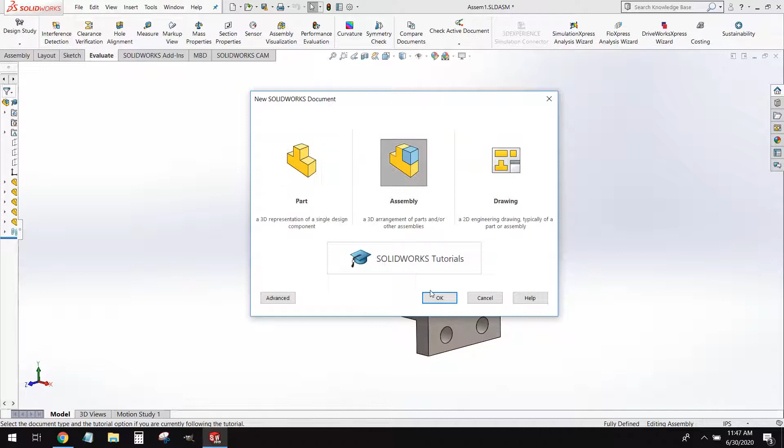We're going to go ahead and create a new assembly file. It's going to give us our blank workspace, and it's going to ask us to insert our first component into this assembly.

There's really no hard and fast rule as to what your first component should be. The way I like to think about it is, imagine you have all your parts laid out on your desk. The first component you insert should be the first piece you pick up and start attaching other parts to. There's no hard and fast rule, it just works a little easier for me, so that's what I recommend.

So we're going to go to Browse, scroll to the folder where we have all of our parts saved, and open up the piece called Base Plate. It should look like this. We're going to go ahead and just set this down anywhere in our workspace.

Now some people like to bring in all of the other components at the same time. I like to bring them in one level at a time, just so my workspace doesn't get too cluttered. So we're going to go to Assembly, Insert Component.

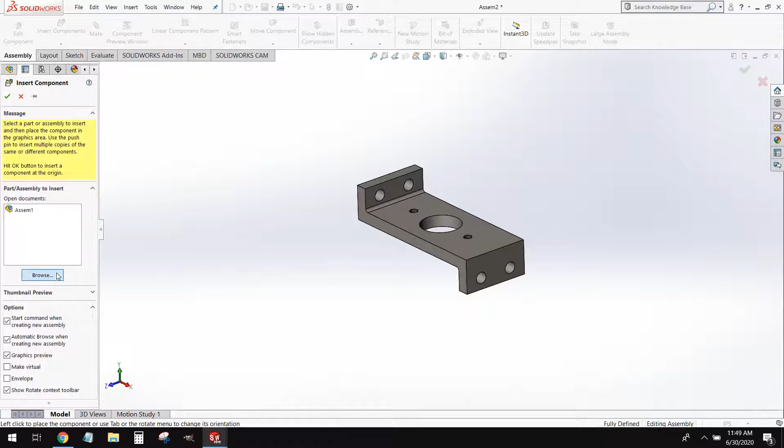It's going to bring us right back to that window we were just at. We're going to go to Browse, and open up this piece here. It's called the bearing.

Anytime we have a part that mates with screw holes, or that attaches with screw holes, we want to mate it using those features. That way, if the part is modeled improperly and the screw holes are misaligned, it won't actually fit together in the assembly, and we can fix the part before we actually have the parts made. It's sort of a check process for us.

So we're going to start by selecting our mate tool - it looks like a paperclip. We're going to select this top surface of our base, and select the bottom surface of the bearing, and click OK.

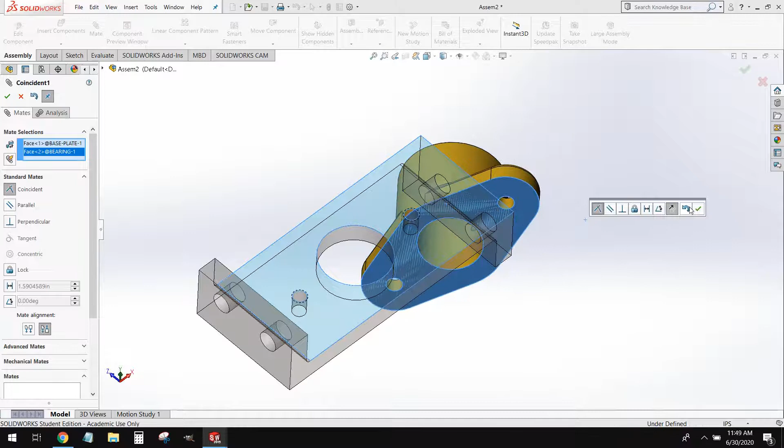All that's going to do is just put this bearing on the same level as the base. A lot of times if your part is slightly angled and you're dragging it around, it might not look like it's sitting on the base - that's just an optical illusion. If you put your part in a perfect side view, you'll see it can't leave that base.

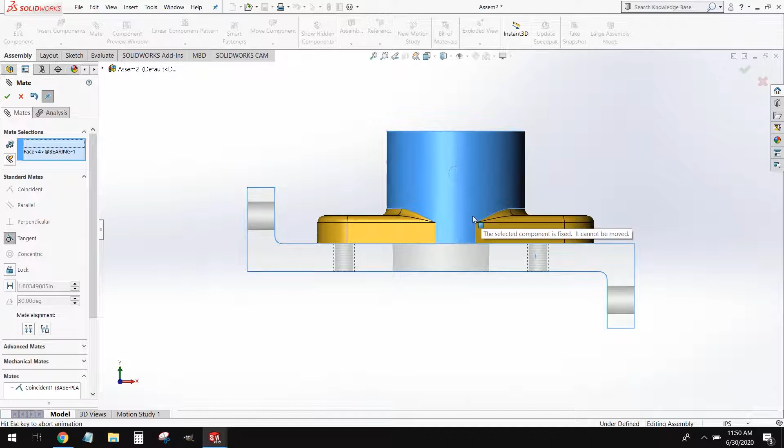It's stuck on there. So like I was talking about earlier, what we're going to do now is align this up using the screw holes.

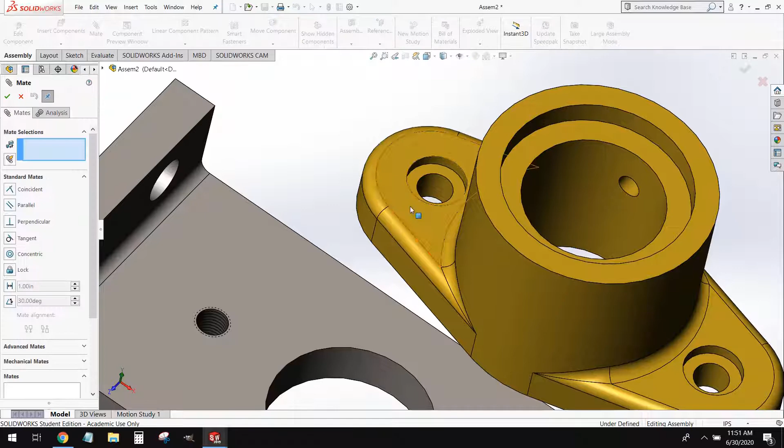To do that, we're going to mate this curved surface here to this curved surface here in our base. Make sure you select the surface when you do this and not the edge. It can give you an issue if you select the edges, so make sure you're selecting a surface, but otherwise the process is the same. You're going to select this surface here and this surface here.

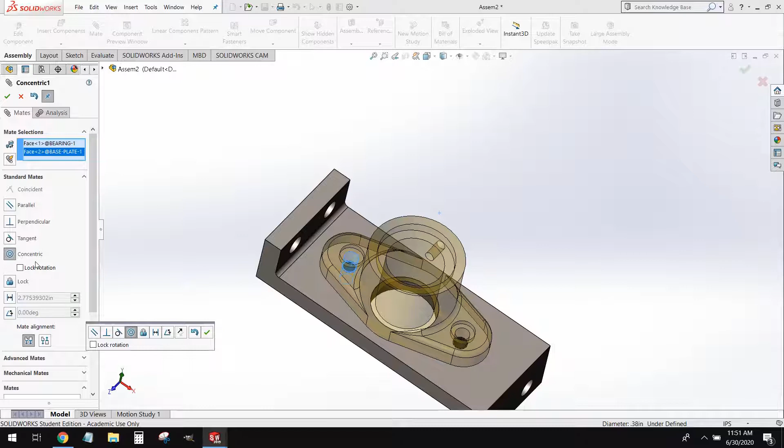Now, the mate tool is pretty intuitive. It typically knows what you want to mate and how it wants to mate it. In another video, we're going to cover the different types of mates and how they're used, but for 99% of your mating, just leaving it to the default settings will be fine. So we can go ahead and select OK on that.

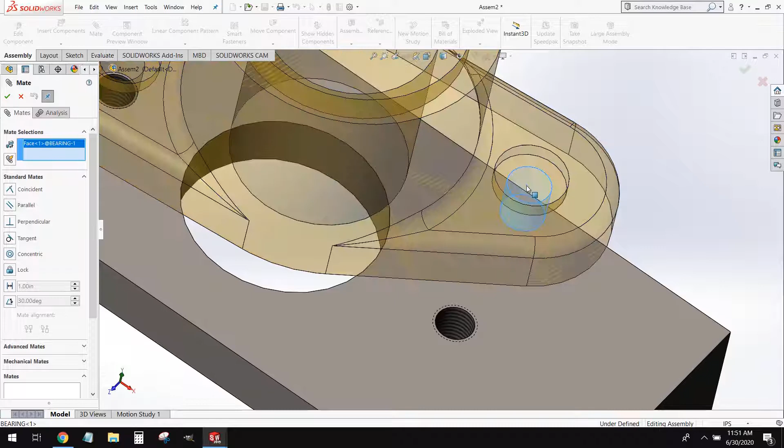Now what we've done is we've mated this with just one location mate, meaning this is still free to pivot around. So what we're going to do is do that same mate with this other screw hole. We'll go to our mate tool and select those two surfaces. If the part is made properly, it will just rotate into alignment. If it doesn't, that means there's an issue with the part and the hole spacing, so that's something you want to pay attention to. And we can select OK.

Now in your model, you'll notice this bearing has a hole in it. It doesn't matter which side that hole is on. It could be the left side, it could be the right side.

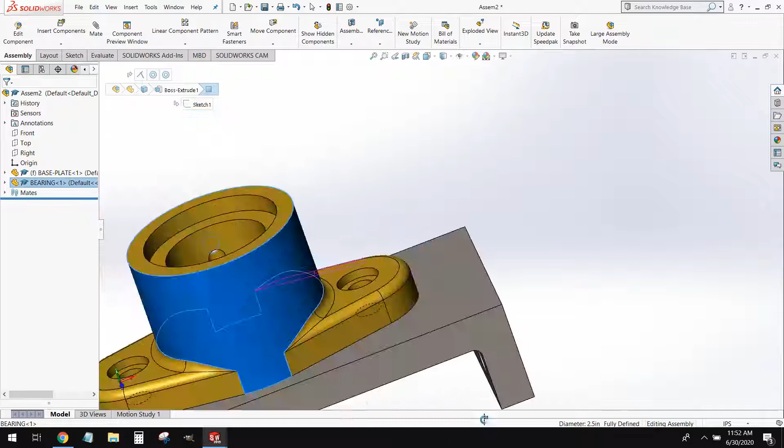So once we have that in, what we're going to do is put in the screws that hold this in place. We're going to go to Insert Component, and we are going to open up this screw, this guy right here. Now we're going to need two of these. What we could do is go to Insert Components, Browse, and bring in another screw. Or, the quick way is to press and hold Control on your keyboard, click, and then drag out a second one. You can drag out hundreds of these if you need to. It's a really quick way to bring in multiple parts.

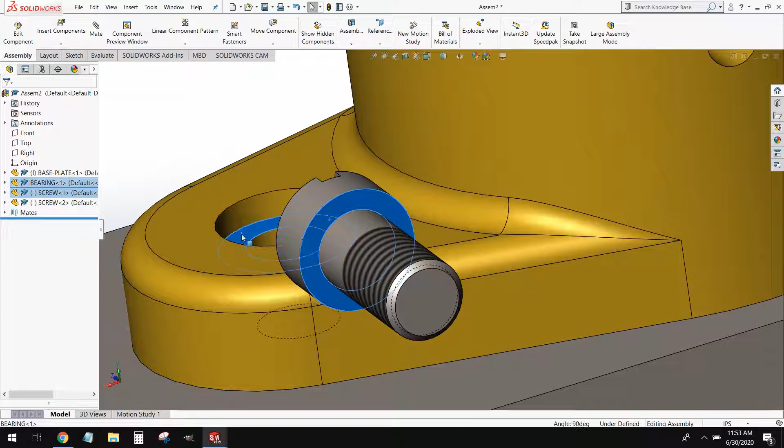Alright, so we're going to deal with one screw at a time, and we're going to mate this very similar to how we just mated the bearing. What we're going to do is select the underside of the screw head right here, and we're going to mate that to this surface here in the bearing. So we can mate that, and we can select OK.

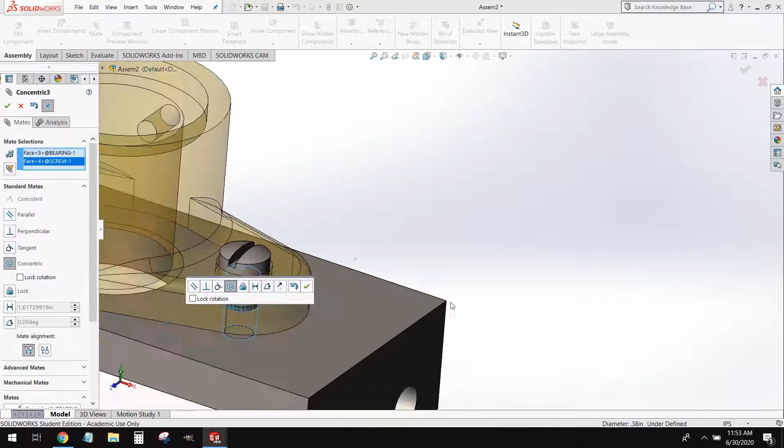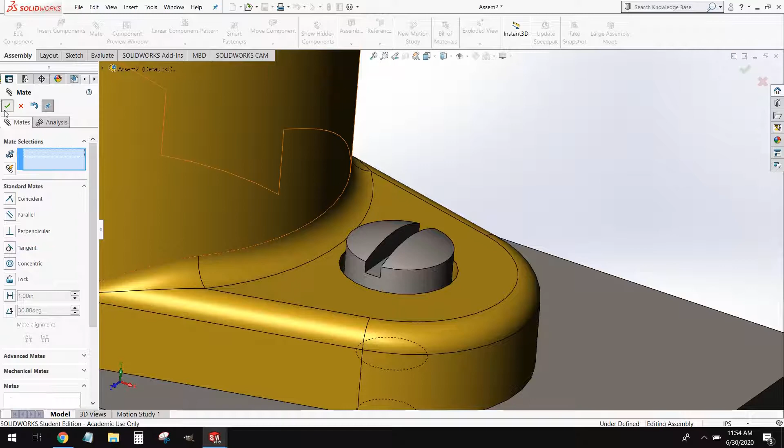And then to get this to sit inside that screw hole, we're going to mate that curved inside surface to the cylinder of the screw hole. Now when we do this, we're going to select lock rotation. What that's going to do is prevent this screw from spinning. I will leave the second screw unlocked just as a demonstration to show you what effect that has. Truth be told, it's not a huge issue for us, but it is something we want to pay attention to.

So what we're going to do is do that same mate to the other screw, and then we're going to do the screw hole to the shaft. Now at this point, you guys should lock your rotation here. The reason I didn't is to show you the effect this has.

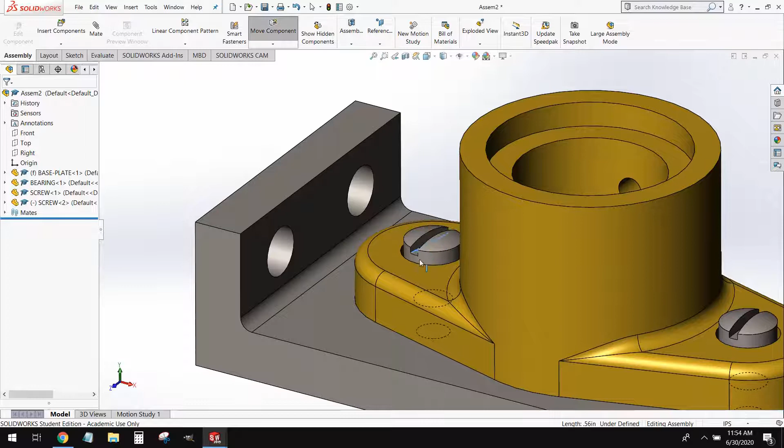So right now we've got our assembly, and it should be fully defined. However, mine is not. Mine's underdefined because I didn't lock the rotation on this screw head. And the only effect that has for us is my screw can pivot around in there. Now realistically, that's not a huge issue. However, when you're working on assemblies, chances are you're working on them with multiple people. Now when somebody opens this assembly up for the first time, they're going to check and see if it's fully defined or underdefined. If it's underdefined, they have to go through all of the mates and figure out why. If it's fully defined, they can start working with it right away.

Now, we just have 4 pieces here, but we already have a handful of mates. If you're working on a 300-piece assembly, which is not uncommon, you're going to have a list of mates a mile long, and it's going to be a pain to check through all of those. So this is why we want to practice good technique when modeling.

Should you find yourself in this situation, look at your mates here, and this concentric mate on the bottom. See how we have 2 of them? Concentric and concentric. This is the locked one, this is the unlocked one. If your bullseye here has a white open center, it's unlocked. So what we're going to do is right click on that and choose lock rotation.

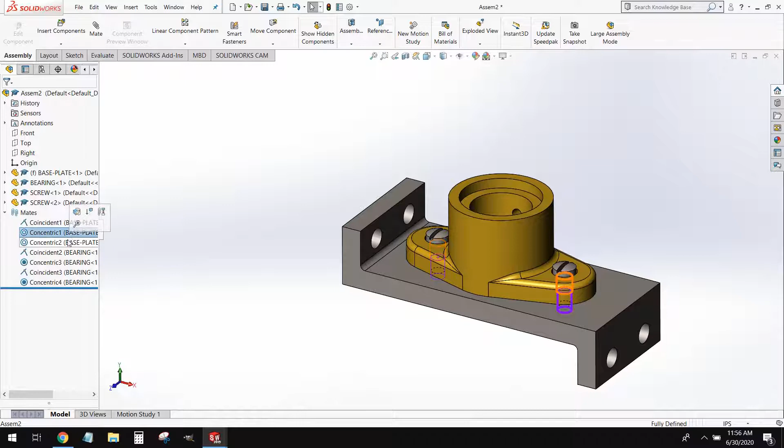These first 2 are going to stay unlocked, and even if I try to lock them, it won't do it. The reason is we mated this bearing with 3 points of contact: 1, 2, and then the bottom. The screws are mated with only 2, which is why those screws can spin and the bearing cannot. So just to explain the difference between those.

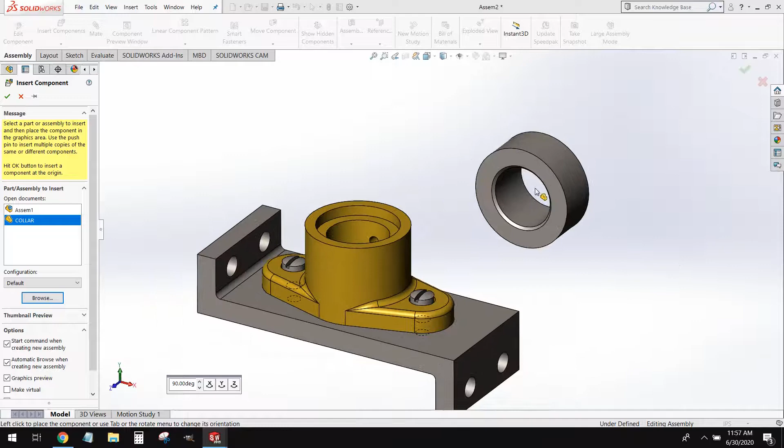So now what we can do is go ahead and go to Insert Components, Browse, and we're going to insert the collar. This guy right here. Essentially we're going to mate this like a big screw. We're going to mate the underside of the head here to the top of the bearing.

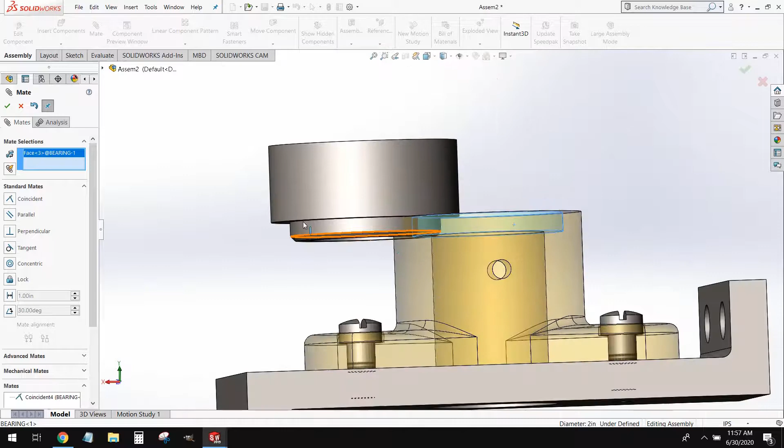And then we're going to mate this cylindrical ring surface to this surface here. And just like we did with the screw, we want to lock rotation. So this is all put together now, and this looks pretty good. We should be happy with this.

Once we're at this point, we're going to go ahead and save this assembly. To get ready for our drawing, we're going to put this into an exploded state.

So once we've got this built and saved, we can select Exploded View. The Exploded View just takes your assembly and blows it apart so you can see how all the pieces fit together. We're going to select Exploded View.

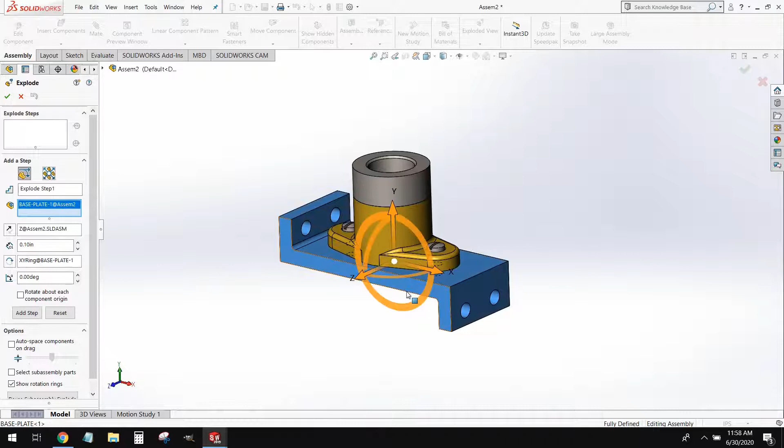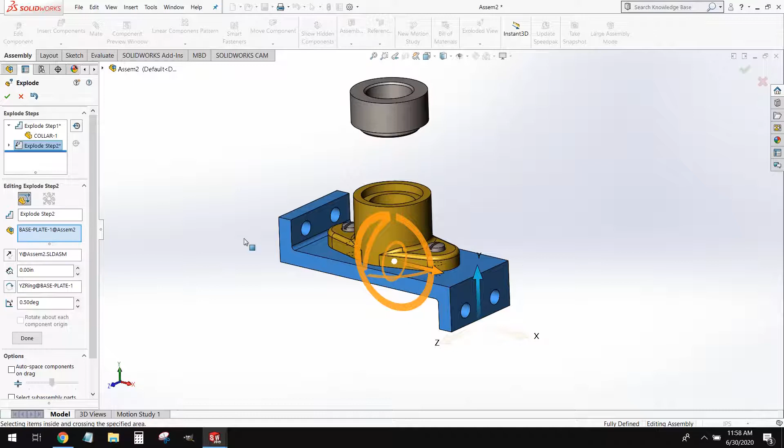Then all we do is select a component, and it will give you this triad, and you can move this component. What you want to do is move the components as little as possible. Here, it's fighting with me. You want to move the components as little as possible to show this part blown apart.

So something kind of like this would be sufficient. This looks good. You can clearly see all the individual components, and you can see roughly how they all fit together. So what we can do is go ahead and select OK.

And that's going to leave it in this exploded state. Now, we didn't actually get rid of any of our mates, and our model is still fully defined. This is just an alternate view that we're looking at.

To collapse this back into its compressed, put together state, we're going to come to Configurations Manager. We're going to expand this default tree, and we see Exploded View here. We can right-click on this and select Collapse or Explode, and that's going to show it in the 2 states.

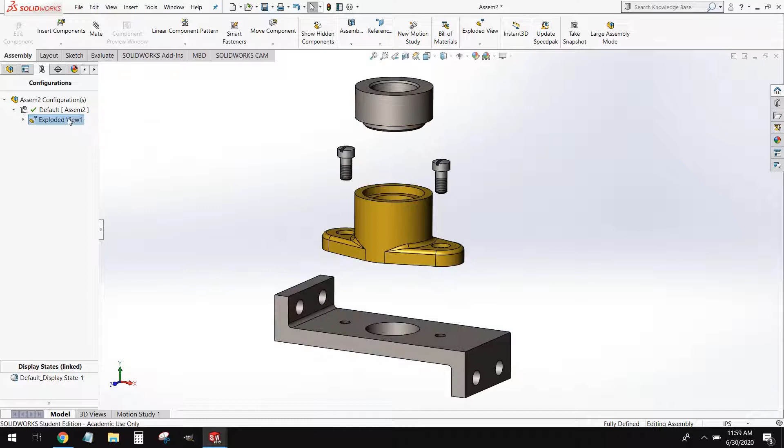Now this is going to be helpful for us when we go ahead and create our drawing in the next video. But for now, you guys can go ahead and save this assembly. If you guys have any questions on this, please let me know. And as always, have a nice day.